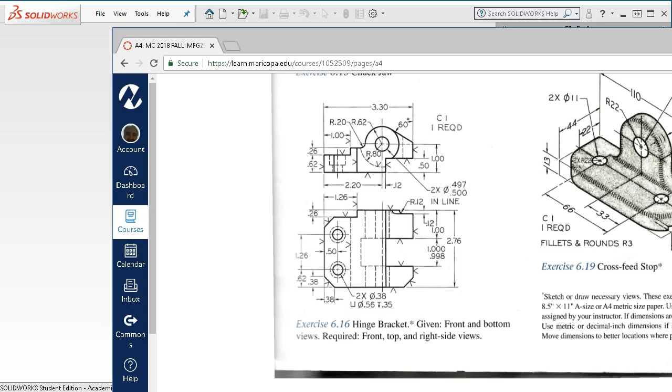So I'm going to fly this out of the way, and this is an inch part. So file new, part inch.

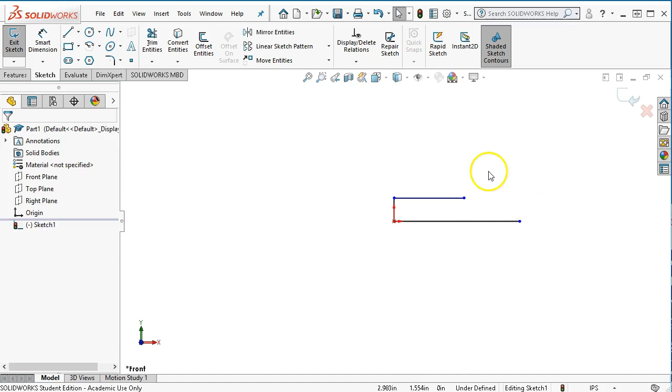In the front plane, as far as a starting point, kind of the lower left corner works okay. We're going to draw a couple of lines, and I think I've got my mouse issue corrected, so I shouldn't see any weird jumps. So an over and an up, and that's, well, I didn't get that one clicked. That's enough to get a few dimensions on it.

So 2.2. And then a height of 0.62. Distance of 1 inch.

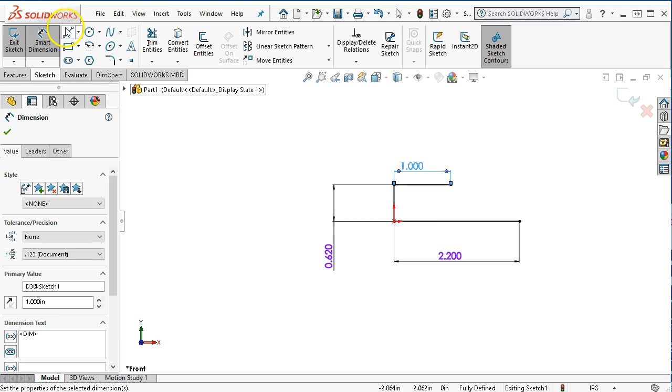Alright, before we get into the more complicated stuff, we'll come up and over, do a few more pieces, still kind of watching for those inference lines. To 1/2 inch. And then the overall is 3.3, so I'll go object to object.

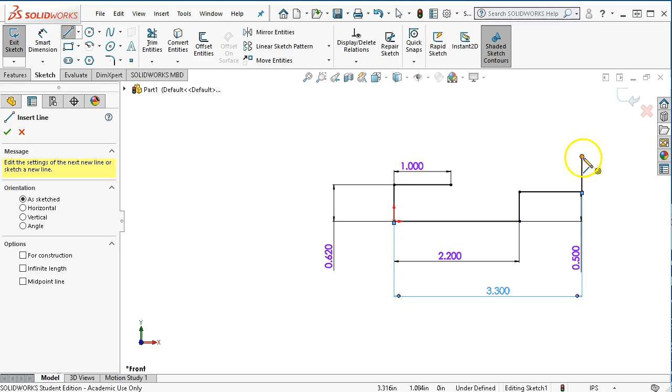Alright, we have an angle of 60 degrees, so back into the line command. This is going to go into the arc, but I don't know that I want to pick that up just yet. So 60 degrees would be from the line to the line, and the non-parallel lines get 60 degrees, and then just watch if you select that endpoint, what it's when it comes up with the four-headed arrow, that you can go ahead and pick on one of the arrows or just clear it out and try again.

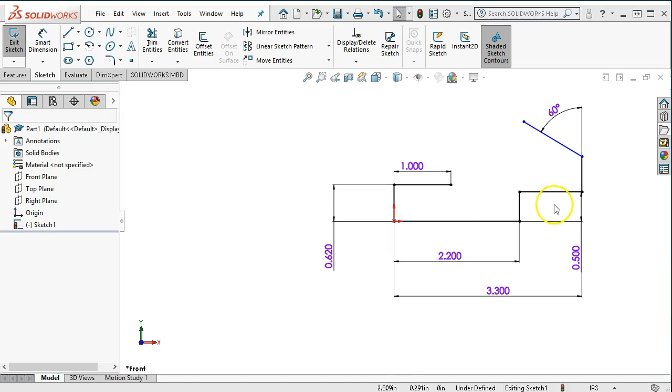Alright, for this arc, since the arc kind of carries over, does a couple of things, and then has a larger arc for this undercut, I'm going to go ahead and make that a circle.

And because this is intended to be contours and regions, let's see, we had a radius of 0.62. In that case, I'm just going to go ahead and leave whatever is given. We'll switch the leaders over from diametral to radial. And then I get the R value, 0.62. Just double check that number.

It has a location. They snuck one in. So we're going to try this. The dimension 2.2 is actually to the center of that circle. So highlighting the dimension, grabbing a hold of the grip, and bringing it to the circle allows me to change its location, or allows me to update the dimension.

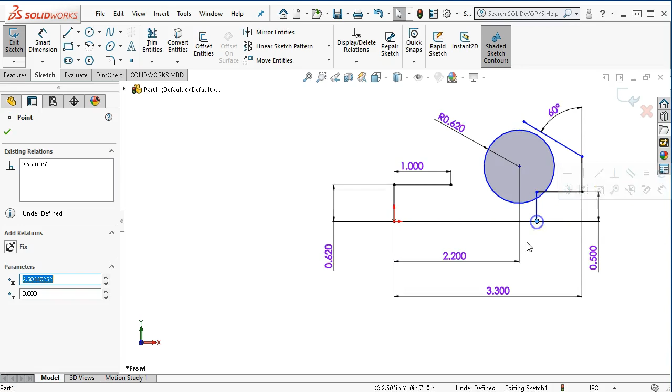Okay, so then from the center of the circle over was 0.12. Okay, so our vertical distance will be 1 inch.

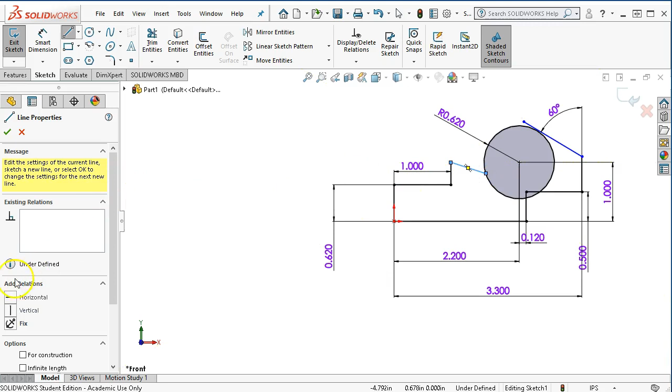So going to the perimeter of the circle, positions, and then we'll go back into select, pick the line, kind of an up and over. That may, no, that's going to get coincident and horizontal. So even though I'm going to go ahead with a horizontal there, that distance is given at 0.26.

Alright, and I'm not concerned with the radius, but there is going to be a little bit of vertical line coming off of tangent, so that'll make it a little bit strange here. So dragging along the perimeter of the circle, I'm just going to bring that line down. And it's just a fingernail of a sliver. I'm not sure if I want to trim out that little section or not. Depends on how difficult it is to pick as part of the contour and region.

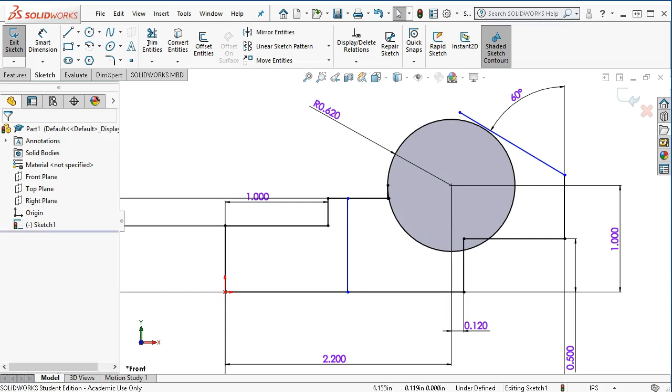Alright, so we have a vertical line, and this dimension can be found on the base, carries up to the top, 1.26.

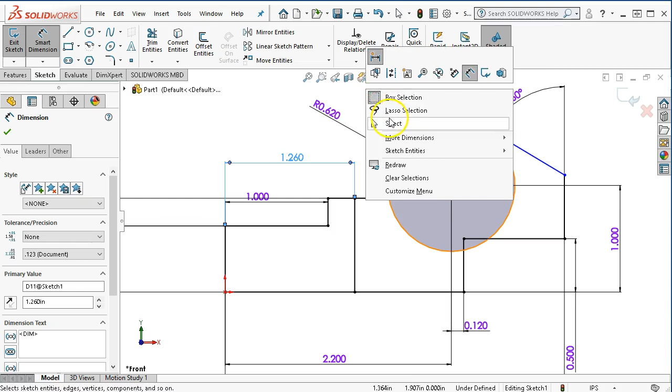All right, and then to bring the angle in, we're going to make it coincident, but then also it needs to be tangent. So select, control-select the circle and the line, and tangent, and we'll find the solution where that point contacts.

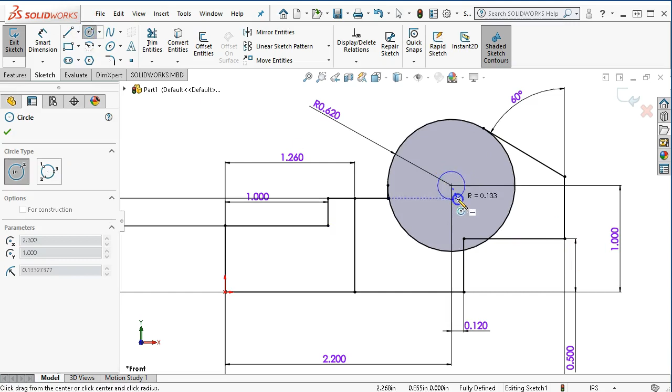All right, so I'm going to say the overlap there. Not quite sure if that's worth the trim, so I'm going to go ahead with the radius of 0.8, which would be 1.6.

And then after the fact, since the math was easy enough to do, we'll switch it to radial, make sure it's 0.8. The through dimension of 0.497 to 500. Our maximum material condition puts it at 497.

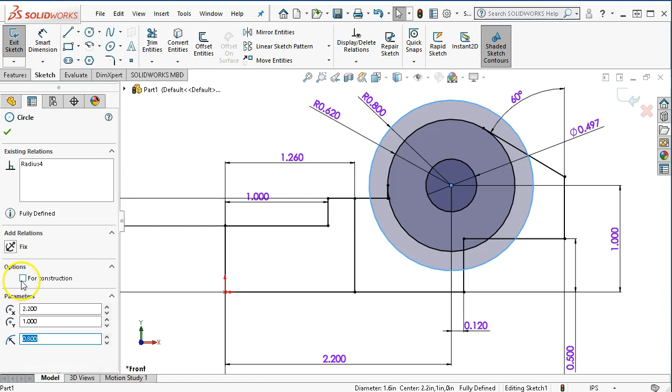And this outer circle really could go to be for construction. And I think I'm going to go ahead and trim this little segment out here, so we'll see what that does to the sketch. So trim to closest, and it didn't cause anything to go undefined, so that's good. And we have enough here to start building our shapes.

So if we just wanted to build this in kind of a stacked mode, then my first dimension for the circle minus the little notch would be to the 0.12. And then the entire face to 0.26, including this lower area.

And then build out the rest of it so that it can be chamfered and the rest of the cuts included. All right, so we're going to try this, see if I can keep track of all my depths. Features, extrude boss. And we're going to take the first, and I'm not going to worry about the center.

We're just going to build it out. Also, I could build the 1/8 of an inch out. Yeah, it just kind of depends on the datum. So I think I'm just going to go ahead and stack everything consistently here. So that's to the 0.12.

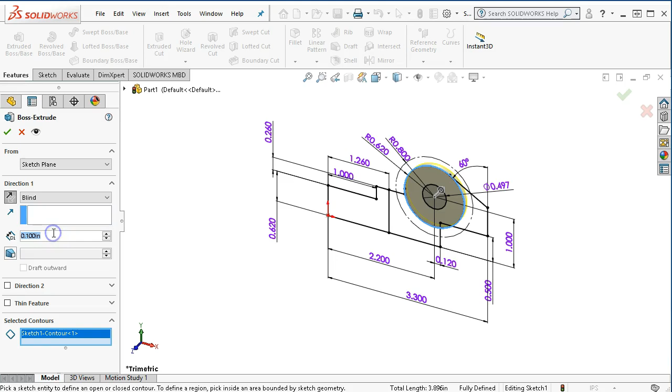All right, and then we're going to share that sketch. So since I already have geometry, we expand out, we select the sketch, and I can go right into Extrude Boss Base. And now I'm picking up the region, and we're going to reverse.

And since I don't have any depth to pick the vertices on this one, let's see what else is going to pick up here from the 0.12 to the 0.26. All right, so maybe not that one just yet.

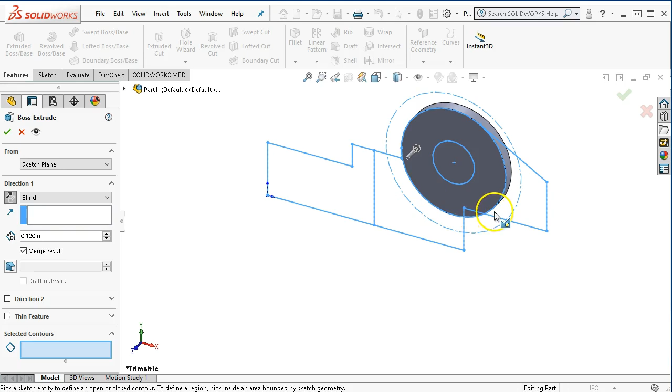All right, so instead of the circle, we're going to need to have the inside region. And the inside region, I'm going to go ahead and include the interior circle. And why did that one not? All right, I'm just going to go ahead and clear selections, make sure that I have good picks.

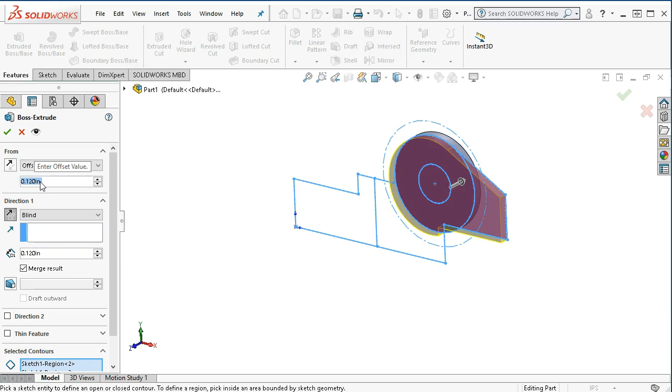All right, so that one's going to be a distance of 0.12. So the problem of working with the offsets is that I'm changing the sketch from this face to the surface. I could have also picked from surface, face, or plane and picked the back. In fact, that's probably a better choice. I can set that number, but then if something happened to that distance and I updated it, then this wouldn't update with it also.

So surface and plane. So it picks up the sketch, carries it back, starts from that distance, and then since the total is 0.26, then we would need to go 0.14.

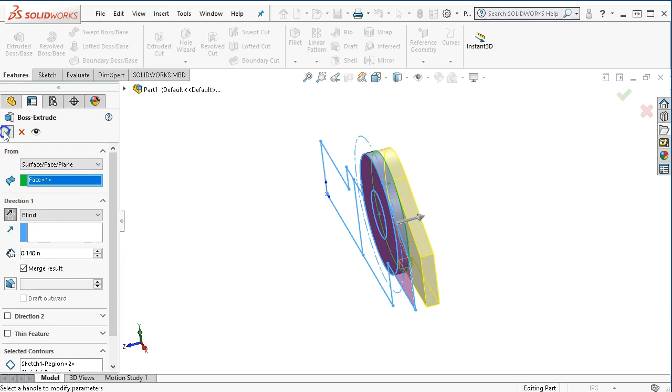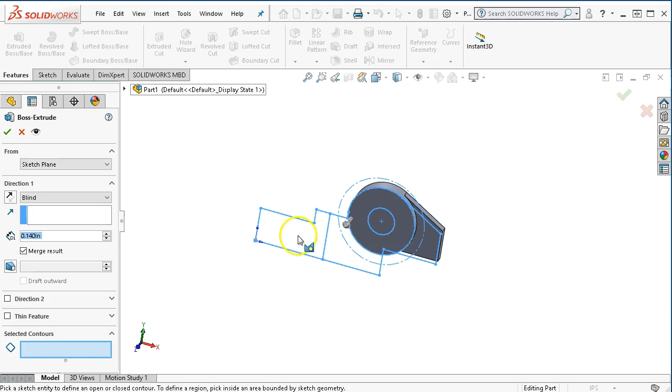All right, and then the rest of our geometry, sketch, extruded boss/base. We'll see if this can go all the way around because, let's see, we have the notch on the front, and then there's also this. Okay, so just verifying the geometry.

So pretty much I'm not concerned about this notch. I'm looking at this notch and the setback for that 0.26. Okay, so selected contour, we'll see if it goes all the way around.

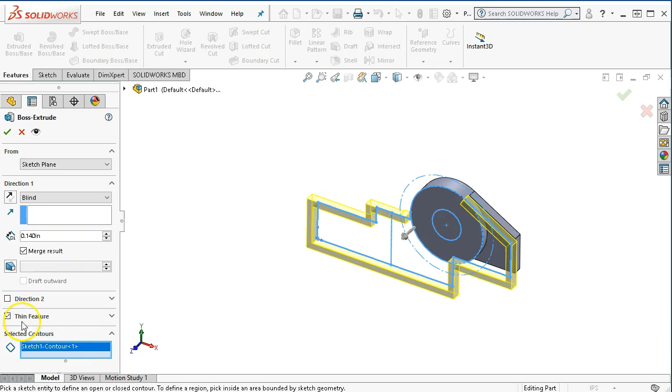Well, it sees that as a thin feature, so that's not going to be good. Thin feature is going to have a wall thickness, and it's going to try and go like a sheet metal part, which is not what I want. So make sure to uncheck the thin feature.

We're going to clear that out and reverse the direction. And we'll just go ahead and select all of the regions. And then where before I did the math, we're going to go surface, face, or plane and pick that, rotate over, pick that back face. And this time, instead of giving it a blind condition that required the math, I'm going to give it an offset from surface.

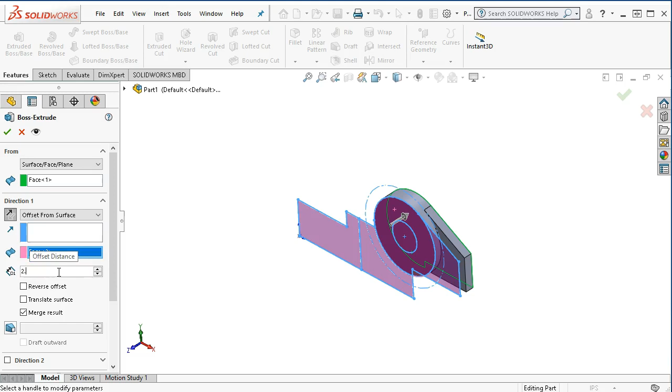All right, so the math is an overall of 2.76. So picking this front face and reversing the direction, let's go with the 2.76. Otherwise, I have to perform that math. All right, and that looks pretty good, so we'll go with it.

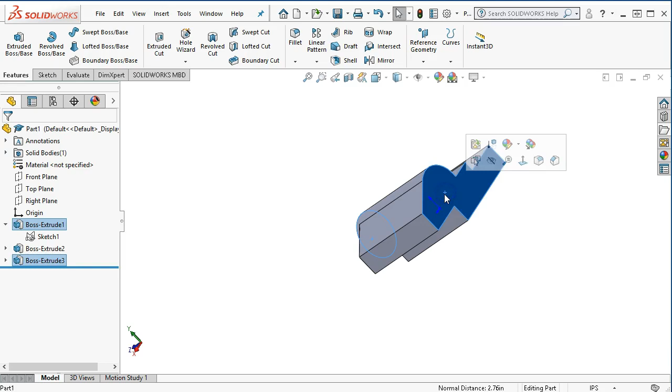The check then is that I have a step to 0.12. I have a step to 0.26, and then the overall from the face to the opposite face, 2.76. So as long as those numbers play out, it doesn't really matter how I get there. It's just the future what-if scenario of I change the depth, I have something else come into play here that was unanticipated, and we have to do something with it.

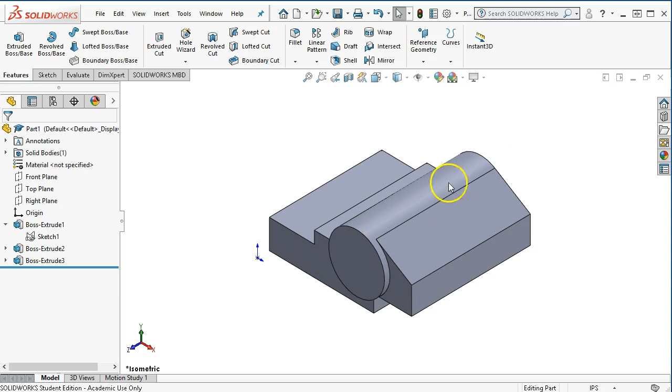All right, so for the through hole, since we've now stacked all those up, rather than dealing with the through hole all the way past, I'm going to go ahead with a cut extrude. We can pick the circle, tell it to go through all, and it becomes our through bore.

All right, so one more cut that we can make on this front sketch before we have to start with the notches and the chamfers.

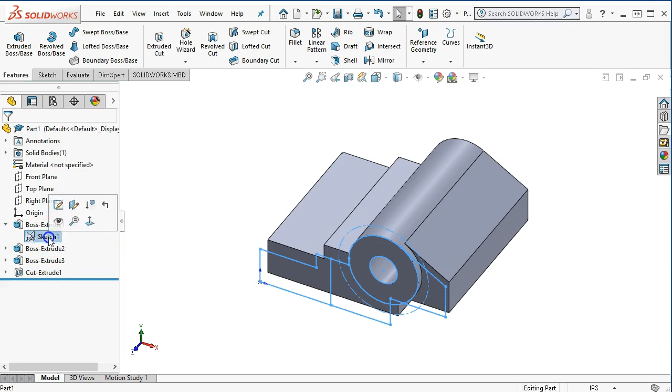Let's go ahead and highlight sketch one more time, extrude cut. We have a distance offset of 1 inch. And then I need to make sure it's going the right way. Oh, I guess it would help to actually select something.

Oh, and it's not going to let me select the construction line. And I didn't really want that construction line to be participating anyway, so we'll just have to kick that one out. So closing it, I'm going to open up a sketch, and by picking the construction line—oh, I'm in the sketch. It's not letting me pick this construction line.

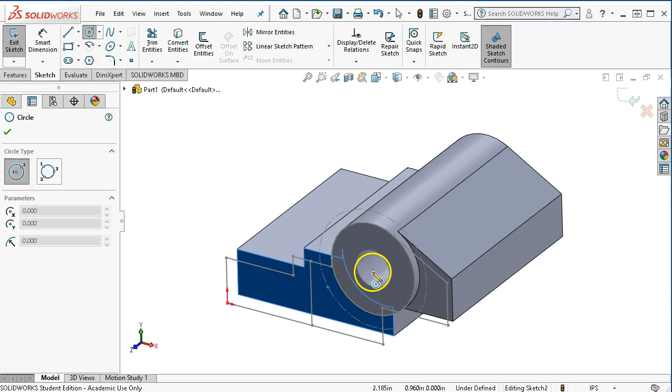Alright, normally I would just convert that, but we'll find the center, bring out a circle. How about a Control 1 to get into the front view? Maybe it has to be shown. Alright, so—

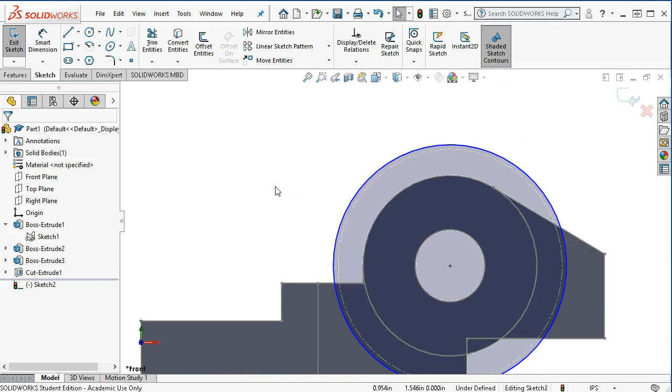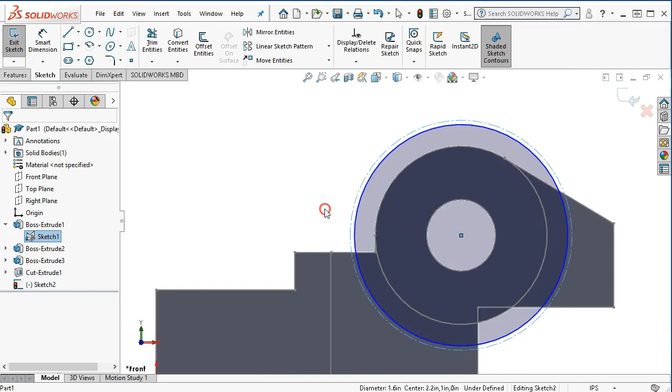Well, there again, I could put the dimension on it, but I have it driven in that first sketch. I would like to tie it back to that. So let's just double check. If I show it, and then right click, edit the sketch—there it goes. Maybe it was grabbing it earlier and I didn't see the lines.

That can be co-radial. Co-radial is one of those cases where it shares the same center and the same radius. Since I drew it from the center, it already kind of did, but the way co-radial works inside of a sketch, you would probably only use it between arcs—but from one sketch to another sketch, then it's going to share the same properties of that construction circle.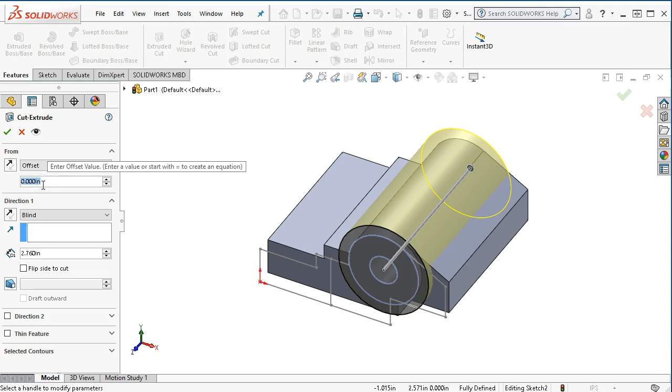Features, extrude cut. Now we can try the offset of 1 inch. We'll make sure it's going the right way, and it's not. Alright, and then we have a limit distance of 1 inch to 998. So blind end condition, maximum material condition gives me 998. And then we build it

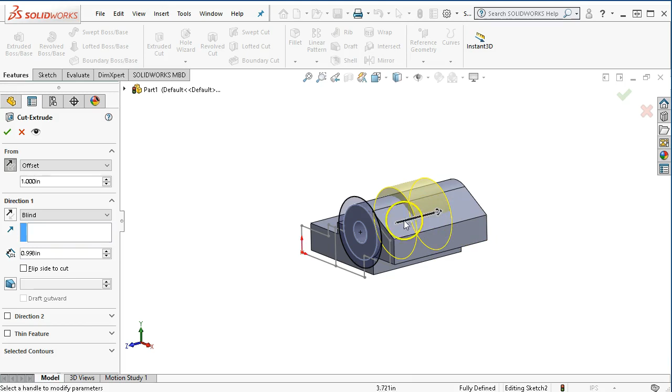as the cutout. Alright. And then the unanticipated issue is that, oh, this needs to go over and take care of all of that. So let's go ahead and accept it, see what the result is—that we have that little bar. But when I look at the bottom view, the circle wasn't enough to fully intersect, so I have to add some additional geometry.

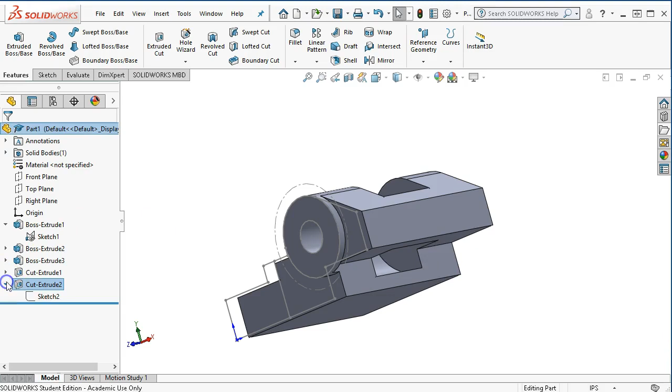Alright, so expanding out for Cut Extrude 2, editing the sketch. Then, I think in this case, well, maybe we'll just—I was going to say convert. Control select the 3 lines, 3 edges, convert the entities. The extra lines, I don't think they hurt anything here. I just don't think it's a best practice to leave them.

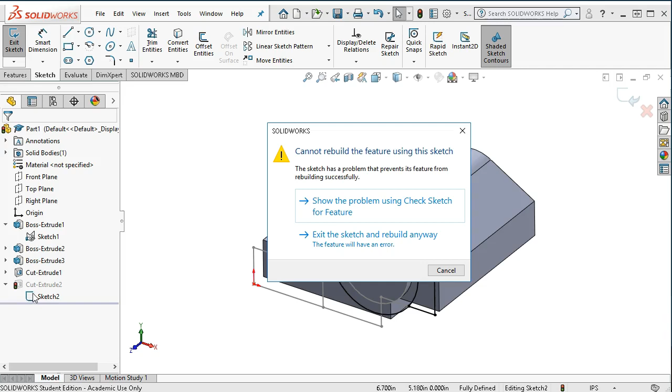And since convert is shown as fully defined, but you can still drag them out to the circle and make them coincident. All right, and then I can accept. And the rebuild error is because I had a standard sketch. I wasn't intending to use contours and regions, but I ended up with them. I'm just going to exit the sketch and rebuild anyway.

And it's going to flash me the warning: has open and close contours. When I go back and edit the feature, it now defaults to where I can pick the circle, I can pick the region, and it removes that extra material.

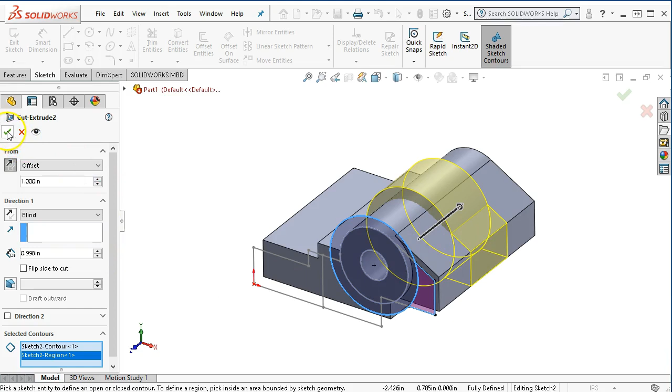Okay, and you know, for that matter, a rectangle—some other geometry didn't have to follow that contour exactly. It just had to be a tool to remove the extra material.

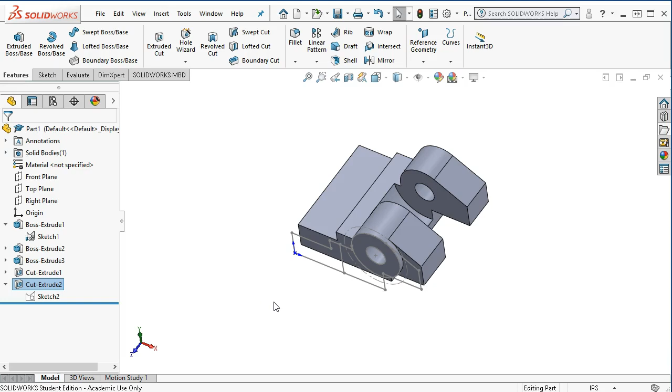All right, so I think that's pretty good there. So that face—nope, I think that face—oh, I was going to try and cut that out, but looking back at it, that was what I was searching for when I first did that. Did I want that? Yes, I need to go back and add that in.

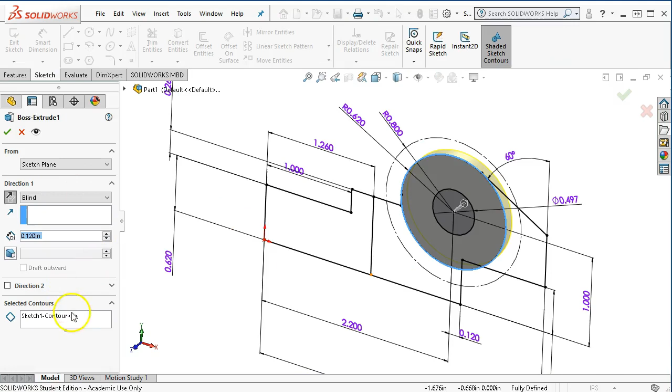All right, so the check on an afterthought is the very first piece. We're going to edit that feature. We have the contour and region, make sure it's selected. I'm going to go ahead and include it. So that comes out 1/8 of an inch. And then, wow, rebuild errors. All right, so what would be boss extrude?

Because that one built out the first segment, now let's go see what the contours were that were selected.

Oh, I got into the sketch, I needed to be into the feature. All right, so the 120 additional distance.

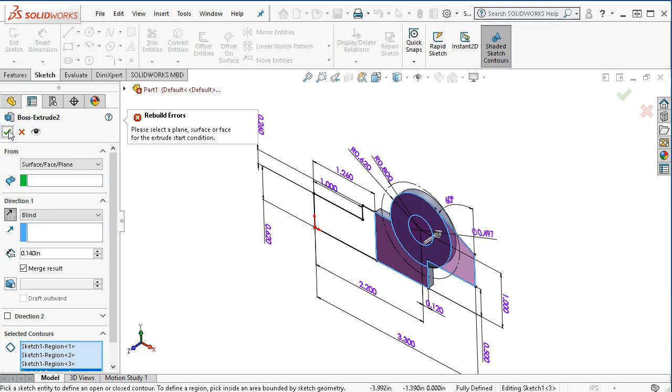Region, region, region, so let's include that region. And then the planar surface, oh, since that geometry changed, add that extra little bit. It wants to redefine or have you make a new selection.

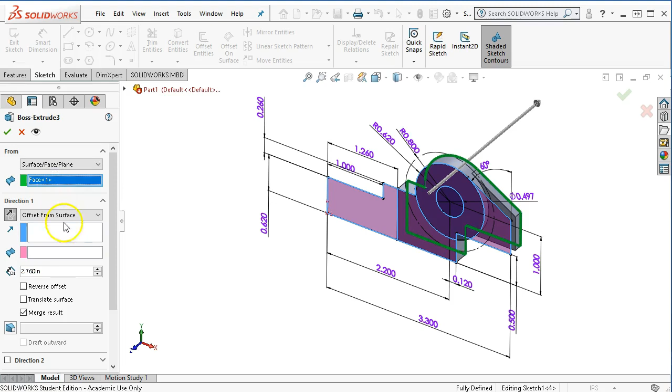All right, so pretty much the same thing. Nope, the face, the offset from surface. So the same thing is that this front face changed. So we're going to pick the distance, make sure the direction is correct. Look at the preview, that looks good.

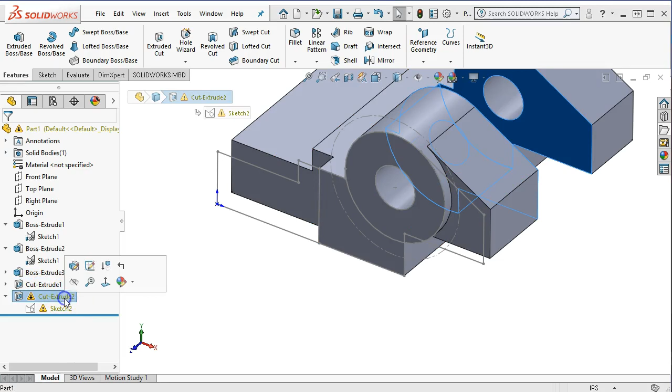All right, and then the last one, the cut extrude. It picked up either a change in the sketch, and actually in the sketch I'm not seeing it. So here would be a place where we display delete relations.

And this is still showing as fully defined. It gives me, it's still showing as an error, but let's go ahead and edit the feature, and an offset distance of 1 inch.

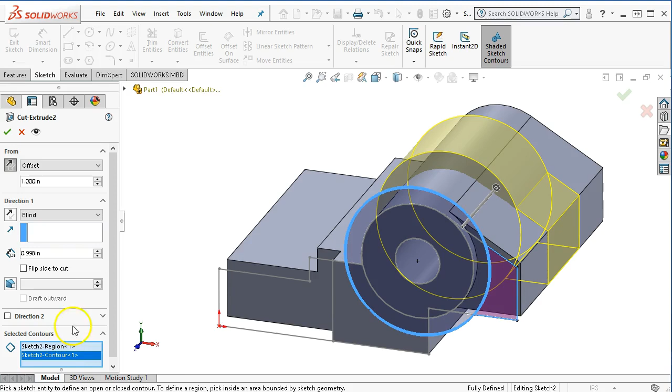Selecting the contour, selecting the face. Alright, so we're going to have to give that one a right click and find out what's wrong. Could not find the face or the plane. So that being the case, this is one of those not very well documented, or doesn't come up very often.

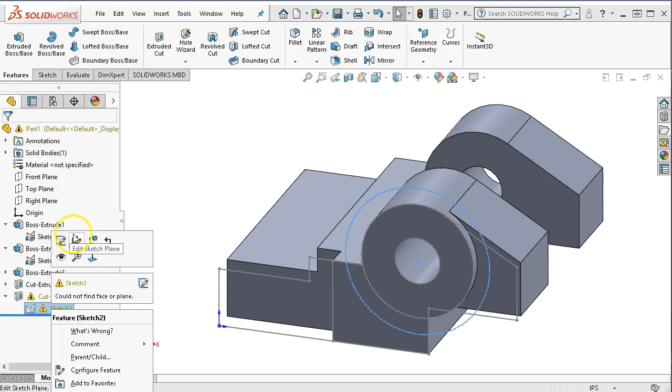That the reason the sketch could not find that face or plane, same reason that we had to reselect, we're going to have to go to edit sketch plane. All right, so at the very top is edit the sketch, the next one too, the second one in, edit sketch plane. Now we're going to see the missing face.

I'm going to come back and select that face, and because I just added that piece of geometry, it's going to create that issue. Now it can find a solution, it makes the adjustment, and finishes out the geometry.

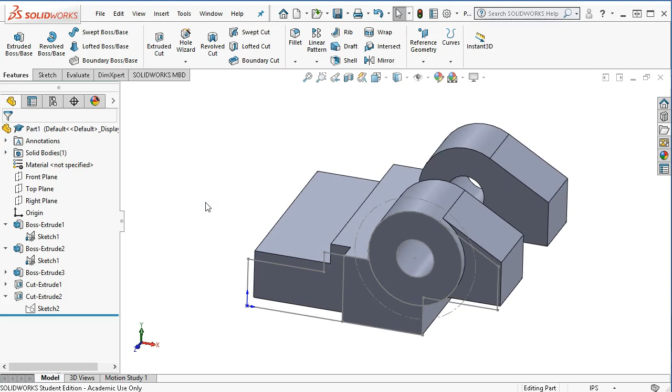Alright, so I want to just kind of check the steps, and we'll fly in. Okay, and then angle, angle, and no angle on the leading front and left. Alright, so I think I've got the majority of the geometry.

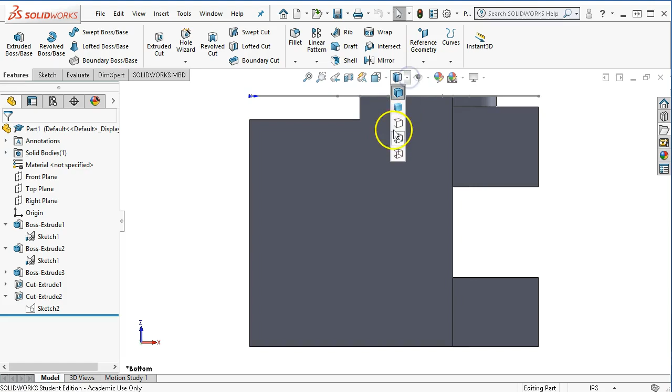Going to a Control 6, looking at it from the bottom, except for the hidden lines visible. Oh, that was the other way to get to the bottom. Now we'll go to hidden lines visible. Now I can kind of see those geometries.

And that looks pretty good. I'm going to stay in the shaded though. So back to shaded, we're through with the sketch, so I'll go back and hide it.

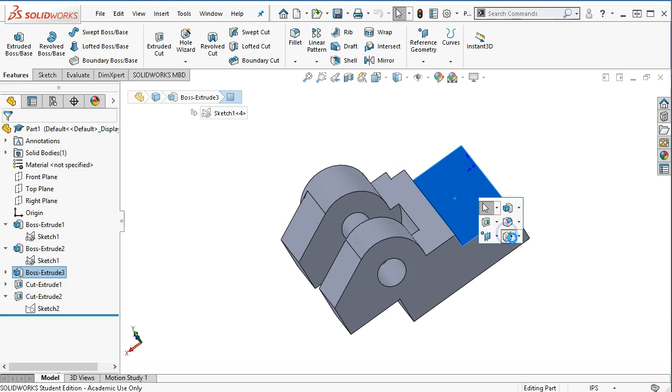All right, and then hole wizard, your choice. Select the face, pick it from the command manager, or hit the S key on the keyboard. Go into the hole wizard, and this is going to be pretty close to a 5/16 counterbore. So we make sure that the counterbore is selected.

We're in ANSI inch. I think we're going to do better with a socket head cap screw, or at least typically we're going to find they're socket head cap screws. This is going to be for a 5/16.

0.56 on the diameter, 0.35 deep. All right, so then since this is custom, we're pretty close for that 5/16. So we're going to override, but just remember that you are putting in these overridden numbers, that making this adjustment comes with making sure, for whatever reason it's not standard.

And then based on the type, there may be a better selection on the type. But other than 5/16 Phillips head, not really. A hex is going to require quite a bit larger relief to get a socket or a driver into that geometry.

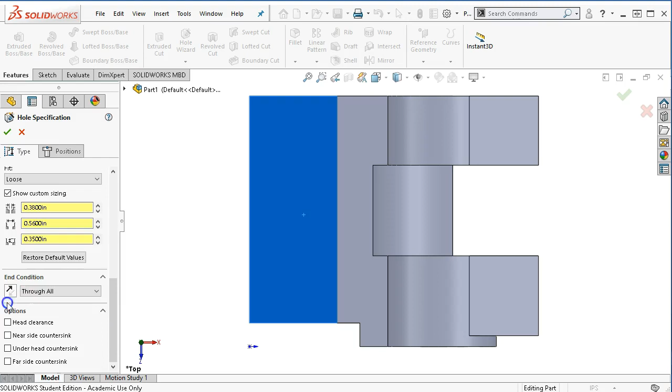No, we don't need a near side countersink. And then for the positions, we're looking at the top view, and we can place the first, go ahead and place the second.

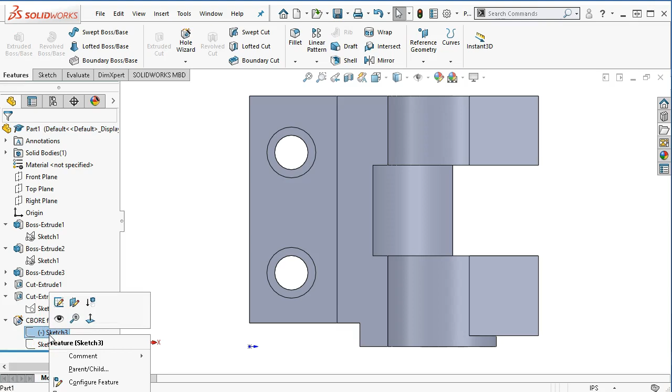And then I right clicked, and occasionally that happens where it's close enough together. This is a good time to take a look at what happens with the hole wizard items. We're definitely not in position. I have the minus sign out front, which tells me that the sketch is underdefined.

In most cases, we're going to want to edit the feature and go back to positions to make that adjustment. Occasionally, you'll be able to edit the sketch. And since I'm just manipulating the points, we'll go vertical. It is 1/2 inch off of the edge.

And then distance 0.62 from, all right, so since we're looking at this from the bottom view, we'll go over to Control 6. And then 0.62.

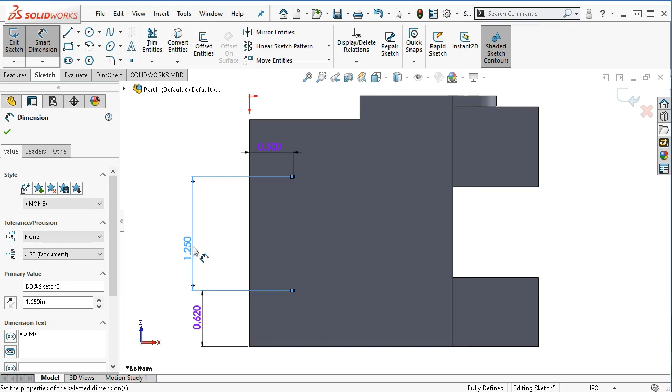And make sure that I can pick those points, 1.25. All right, so that gives me fully defined sketch.

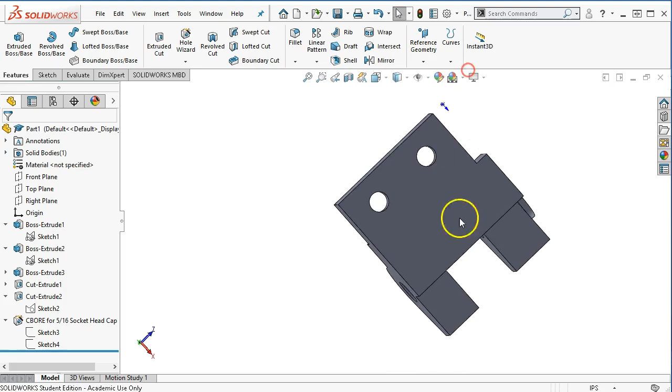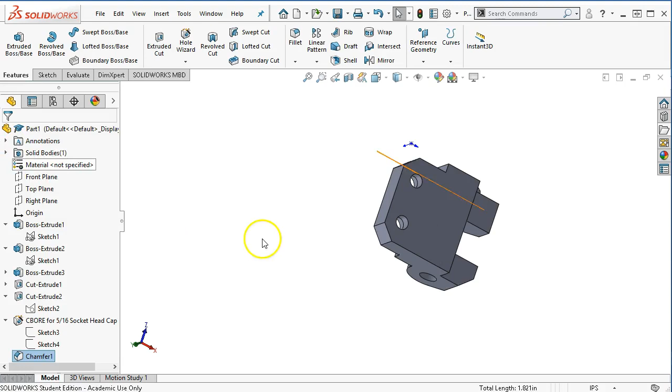And the features. Let's go ahead with this - probably better to look at it this way so I don't lose my frame of reference. We have a chamfer of 3/8, 3/8, and 3/8. So I'll make sure I'm in my chamfer, 0.38, and accept.

So the chamfers and the fillets go in last as a general rule. There are times where you may need one of the geometries to be in earlier, but for the most part we're going to try to put those last so a fillet's not driving geometry or interfering.

Radius of 0.2 in the corner, and then a radius of 0.12. Since those are not the same, fly that back out - it's not really going to matter.

Oh, and I grabbed an extra edge, got a little click happy there. 0.2. And oh, my previews aren't on, so no preview - I'm not going to see anything. Let's go to a full preview.

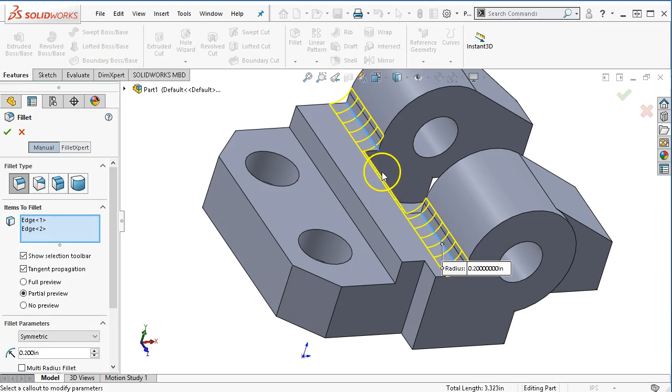Well, it should catch up. How about a partial preview? Show me one of them. All right, so that's an interesting consequence of the fillet - when we have tangent propagation on, since there's just a little sliver, it would try to leave that sliver, and it depends on our machining process whether that would actually be there.

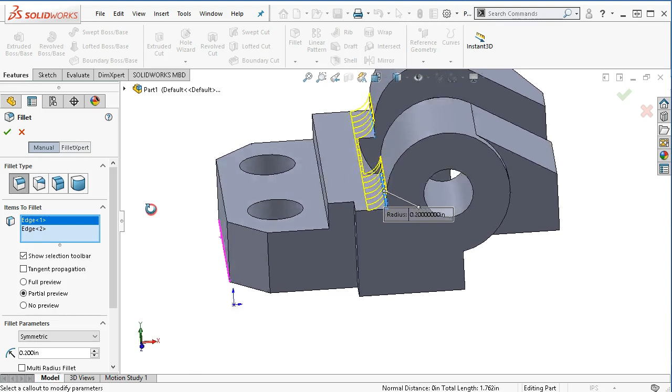So if I turn off tangent propagation, and we have the two edges, well, it's going to be intent on leaving that there. And no, I don't want to mess with those.

Profile. Let's go ahead with the FeatureXpert, since that little sliver is probably the one that has a problem. I'm going to say that FeatureXpert's probably going to put a fillet and leave that - so two separate features, and go ahead and keep the partial results in this case.

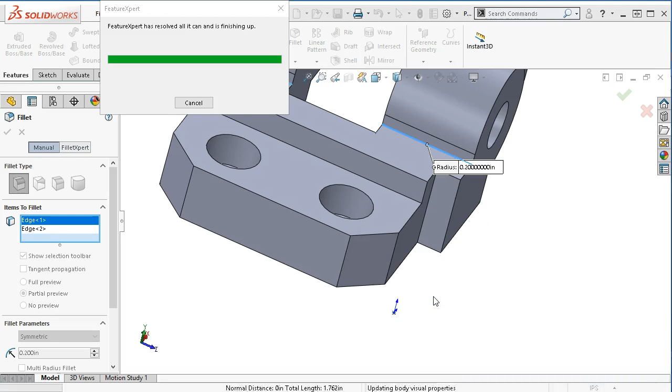Oh, that is interesting. Okay, I did not expect it to go. And where did that fillet come from? Not sure why it put it up there. There we go. Yeah, okay, so I'm still a little not quite sure what it did there.

All right, so depending on the manufacturing process to remove that material, then we could potentially end up with a little bit of sharp in there that is not really shown or picked up in the drawing.

All right, so 0.12 - and that'll give me the blend. Back to the geometry.

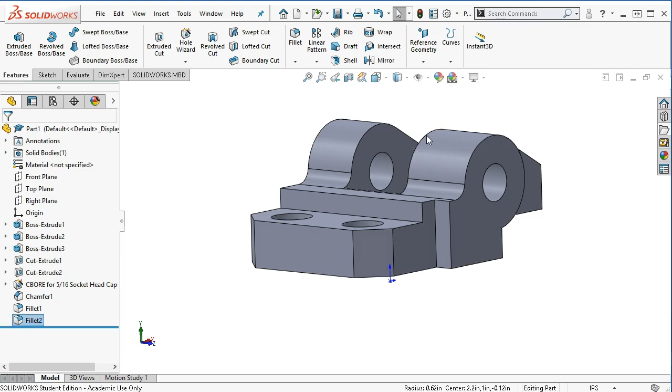Okay, so without more information on the surface finish callouts - if it is just, you know, we want a nice finish, or if it is actually going to be something that needs to be ground - without some additional tolerancing, or maybe even some GD&T to tell us what the intent is, we're just going to call those marks as a standard 16 to 32 finish, that the rest of the part can be rough machined.

All right, so we're going to save to assignment 4 and 615. Oh, 616 hinge bracket. And put my initials on it and save.

All right, so just a little bit off screen there. All right, so optionally, creating a drawing for this piece, since we're given the front and the bottom and want to have those other views, then we're going to go into New, and we'll stay with the drawing. When we create the template, we'll probably do that next as an in-between before we get into the revolves.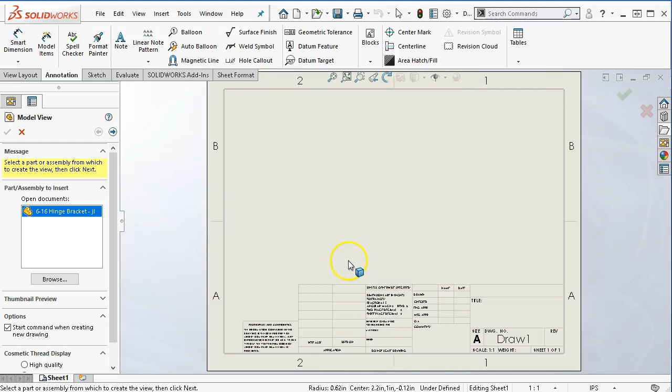We'll create a simple template, and then we can use that. In the meantime, go ahead with the ANSI landscape, or put in the 11 inch by 8.5 inch, and we'll just go with a blank piece.

All right, and again, this is optional. If you're interested in the drafting side and making the detail drawings, then go ahead and carry these through. The more seat time that you get with the drawings, the easier it gets - the more problems that you encounter and can solve, the better off you'll be.

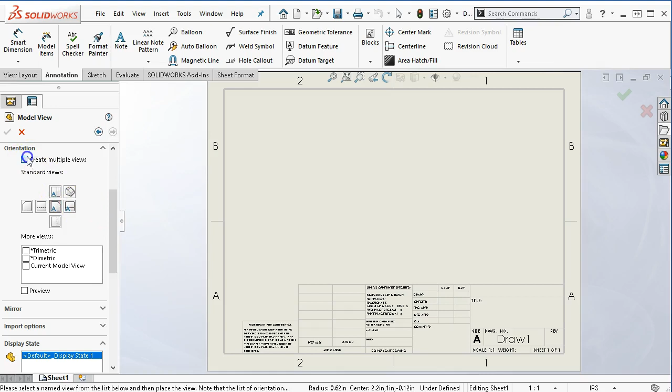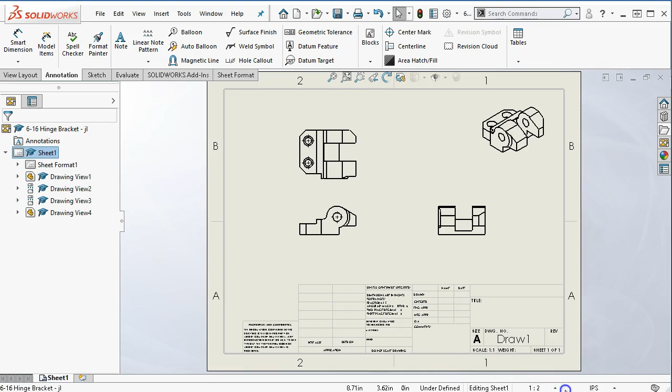So we're going to put in the 3 views. And we have the center view and the isometric view. Those are a little on the small side - let's see what it gets. 1/2. I doubt it's going to be able to take a 1-to-1, but we'll go ahead and look.

Really close on the 1-to-1. So I would like to have the 1-to-1 on the A side, or A size sheet, but the advantage of having a smaller title block would be that I would have more room to manipulate these. So let's go ahead and leave it.

I'm going to shrink the isometric view from the sheet scale to a custom scale, and then we'll place it at 1/2 since it's just for reference.

And then some dimensions. All right, so we're in the top view now. I haven't set up any layers - we'll do that when we make the template. So we'll just put a few basic dimensions on this to get it started, get a feel for the layout and the position.

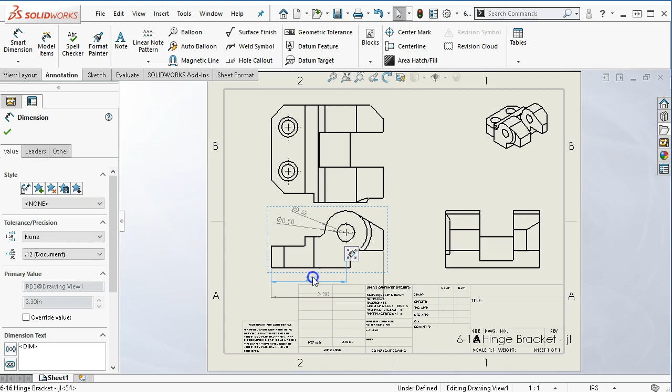All right, keep in mind, move that up just a little bit, manipulate these around. And then our overall depths, so the 2.76. This also gives us an opportunity to double check the dimensions, since there were those strange stack-ups and some of the things that went on in the build. It gives us an opportunity to verify that geometry, that we ended up with the correct result, and it gives us a next opportunity for error checking.

All right, so since this is in 2 decimal places, and I have that, I didn't worry about marking it for drawing. Let's go to 3 decimal places, and this will be a limit dimension. So a limit with a minus 0.002.

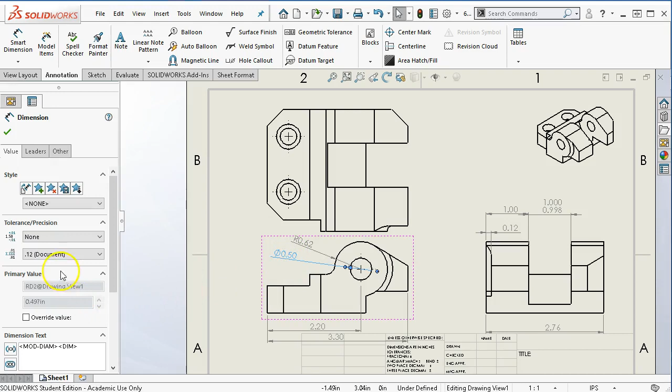All right, and then same thing with the through hole. Oh, I already applied that. So if I need to, we'll go to a limit dimension minus 0.003. I'm just doing that math. 500 minus 497 gives me 3 thousandths, and putting plus or minus 3 thousandths gives it that separation for the limit. So slightly undersized.

When you're using the hole wizard, then we would want to go with the hole callout, and it's going to apply dimensions to the geometry.

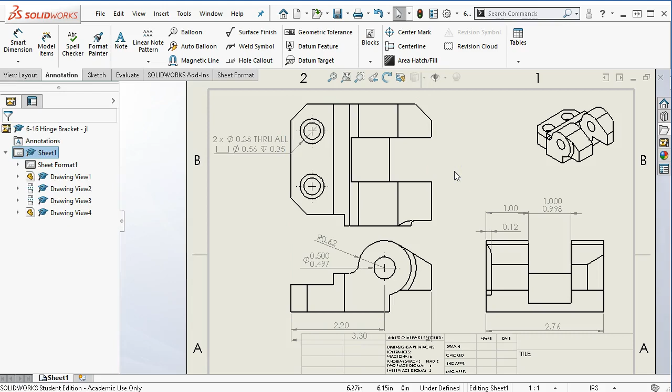Let's see if we can move the front view over a little bit, make some room for that. All right, so the takeaway here is don't make the drawing so tight to the sheet that you have to cram everything in. It needs to visually make sense as to what we're doing.

And then the other circle we will need for that radius, so having some hidden lines would help. And since that didn't carry over, use parent style and parent style. So a little extra information maybe makes it a little busier than what I would like, but it gives a little more detail.

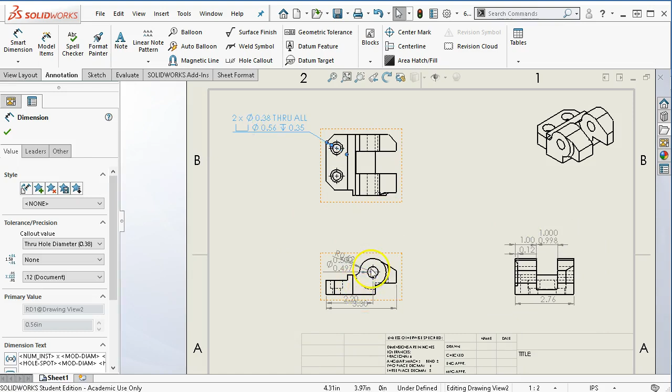All right, so once we kind of realize that, yeah, we really have crammed a lot, let's go back to the 1 to 2, half scale. Place our dimensions again. But for the most part, we should be in pretty good shape as far as we haven't lost any dimensions, nothing really changed.

What we wouldn't want to do is rotate the front view after it's been established, because then the dimensions would be lost for the most part.

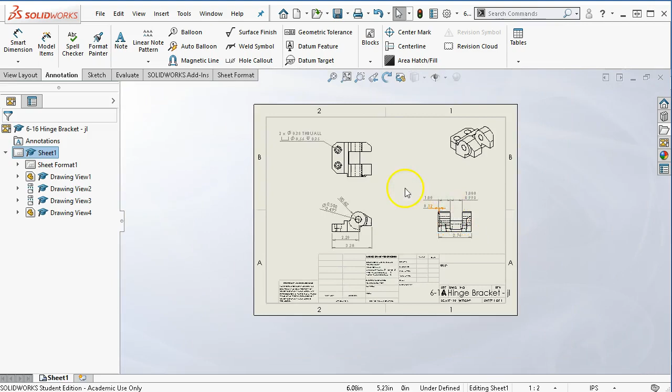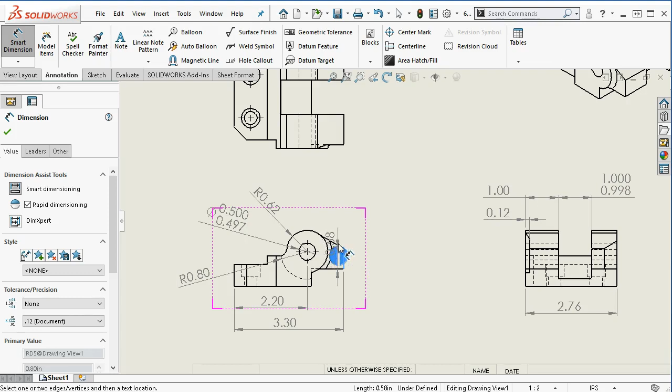So what else can we put on here? Typically would not dimension to the hidden line, but it is available, so we'll put in the 0.8. We have the 60 degree off of the nose. All right, so we'll kind of fit that in.

Once it's fit in, then we can make it a little better looking in positioning it. And then our hole locations. Remember, if you go to the center lines, you want to pick the horizontal or the vertical depending on the orientation. So from the back edge to the center line, that would be a horizontal, and then those two would be your verticals.

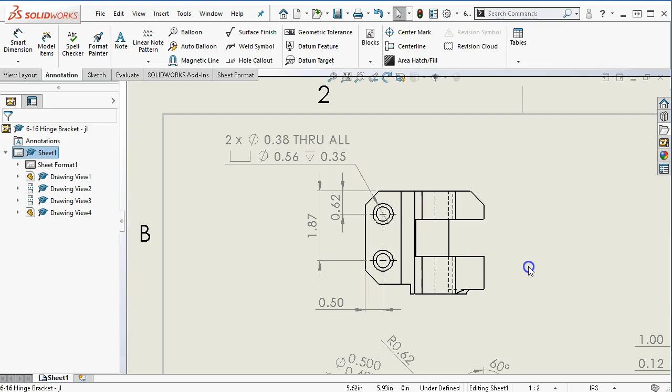All right, and then notice that even though I called out for a 5/16 and the defaults were a little different, it still picked up my custom sizes for the counterbores. All right, so you can put a few more dimensions on, save it.

The takeaway, notice it's saving the same name as the part file in this case. We're just doing single parts. We're not going to do all of these, just enough to kind of build in, and then later on we'll focus on the drawings as well.

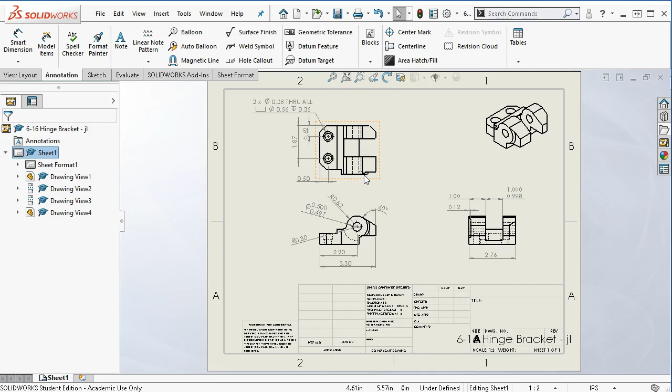The takeaway is that when you make a change going back to this model, when I made that change, adding this geometry, because there were other objects that were built on top of it or related to it, it makes downstream changes, or in this case upstream changes, that we have to recover from.

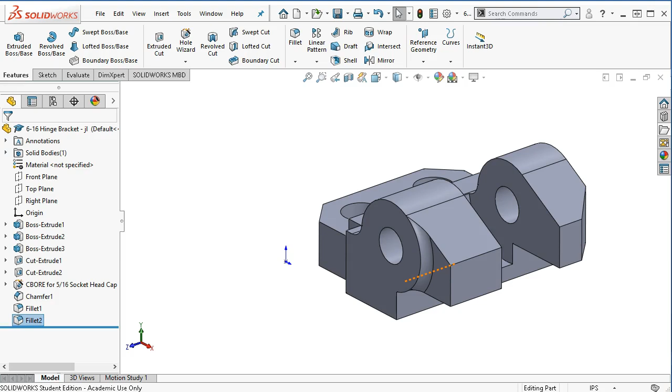None of those errors is particularly catastrophic, but taken as a whole, they're kind of a nuisance, and you have to go through and identify and troubleshoot each one individually. So don't panic when you make a change and see all of the red and the yellows. Just kind of go through it systematically, and remember that you can go into a sketch and change its sketch plane, especially if that initial face was modified or changed after the fact.